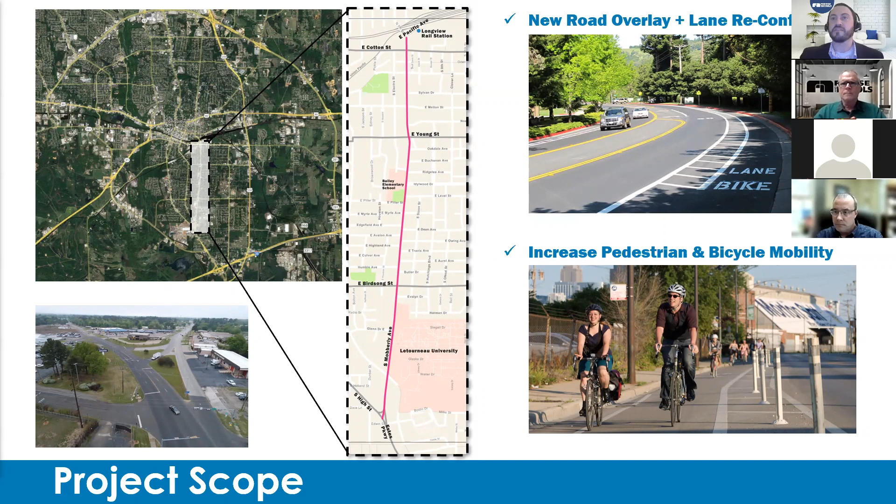The project is municipal bond funded, primarily through the Proposition B initiative. We've also been awarded a TxDOT grant for some additional funds to the project under their transportation alternatives program.

So we're really excited about that. It's good news. Sometimes it can be a competitive grant to get.

This is kind of the project schedule in a nutshell. This is probably going to be about a 3 to 4 year process. Right now, we are right in the middle of the study and report phase.

This is where we're focusing the bulk of our community involvement meetings. This phase started earlier this year in the spring, and it's probably going to run up until the spring of next year, where we're evaluating alternatives and developing concepts for the road corridor itself.

We're going to move into the preliminary design phase after that, in the spring of 2022, where we'll look to take our design concepts and implement them along the corridor. That will probably take up until the fall of 2022.

And then after that, we start putting together our construction documents at the end of 2022, really looking to get this thing out for bid for contractors by the summer of 2023. You're probably looking at about a year-long construction period, where the project might get built around November of 2024.

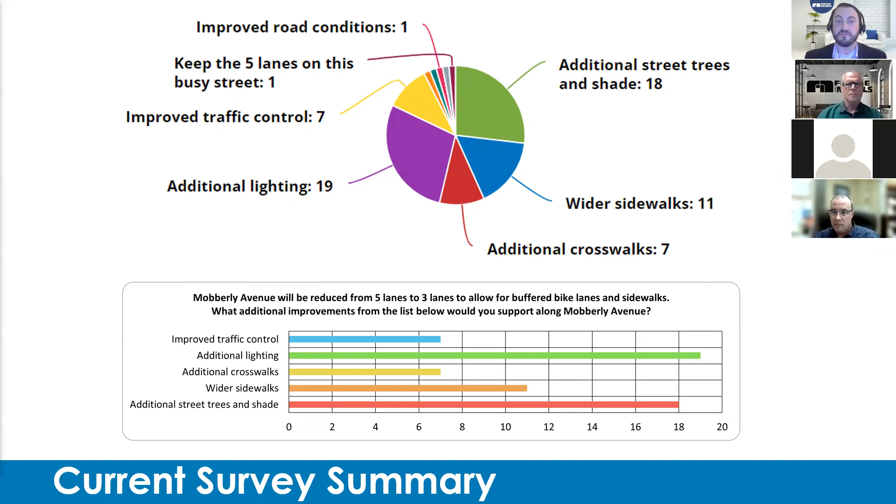And so far, if you look at that pie chart, additional lighting is identified as the biggest need on Mobberly by you guys. And then a close second would be the need for street trees. So that was some good information we received.

Another part of the survey is a mapping exercise, where we actually have an aerial map of the proposed project limits, and we just ask you to put pins on the map. Where do you think the needs are? Where do you think some of the issues are? And it was a good exercise.

Some key takeaways so far: some folks identified that they'd like to see some site furnishings near the Young Street intersection. We learned that there are people who like to bike to South Ward Community Park. We heard multiple times people want more street trees, and we saw some safety concerns on the east side of Mobberly between Melton and Timpson. Good information, and we hope you keep adding to that so we can build a good database of feedback to take into the design phase.

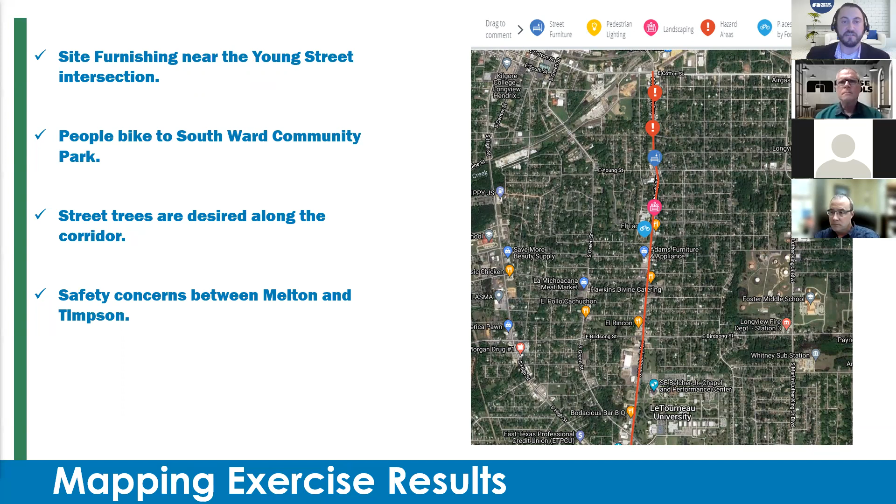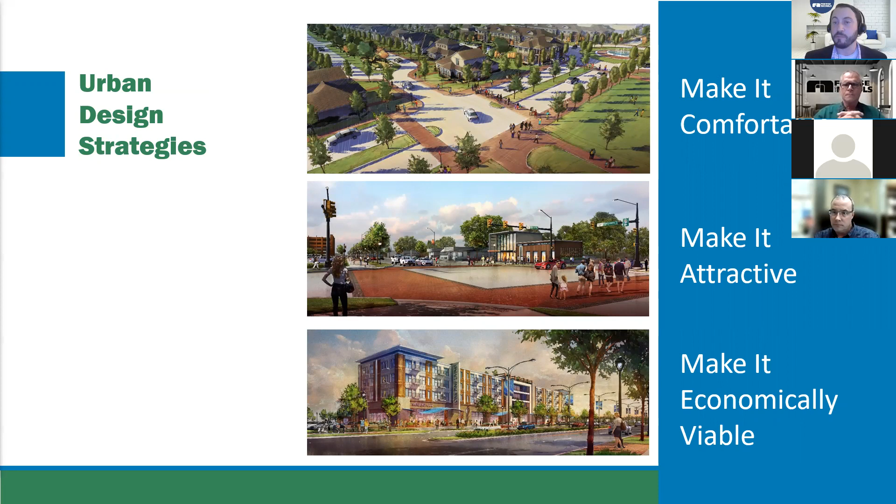So why are we asking you questions about what you might want to see added to the project? This is a complete street project, and the primary goal is enhancement of pedestrian mobility along a road, with bike lanes and sidewalks. Those are givens on projects like this, but it's one thing to provide them and another to make them usable. We want people to want to use the bike lanes and walk on the sidewalks. So we employ various urban design strategies to make these complete street projects more successful. We want to make it comfortable and attractive for people to be there, and economically viable so it can attract outside development interest.

Right now, early in the process, we're evaluating a lot of things and developing different alternatives for how we approach different elements. Looking at the public involvement, we're identifying key focus areas, and street trees was a high priority item on the list. So right now we're in the process of evaluating how we want to do that.

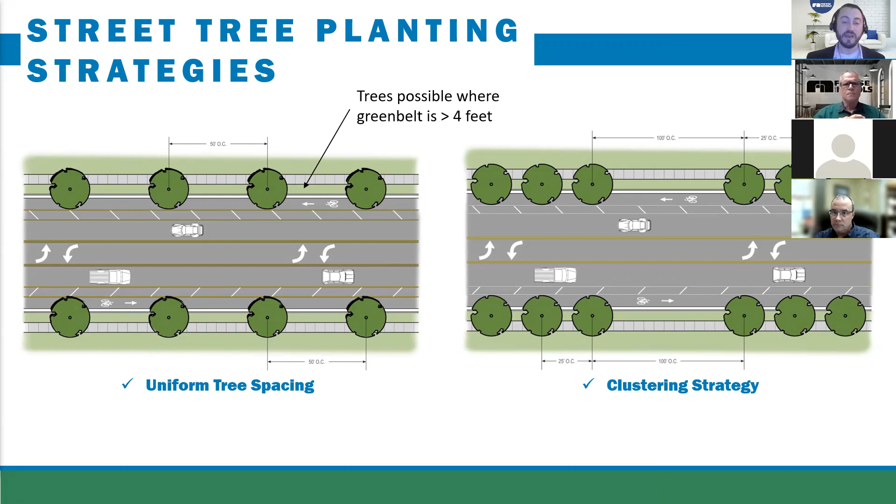Where we've got a parkway strip from the back of curb to the sidewalk, if that's less than 4 feet, we won't be able to put street trees there. But if we've got a good 4 foot or greater space, that would be a primary area where we'd look to put street trees, and we're starting to look at how to arrange them — do we go with a more traditional uniform spacing, or look at employing a clustering strategy?

We're evaluating species. Tree plantings in open space is one thing, but roadways are a very different environment — they're very harsh on trees. So we really have to be careful with our species selection to make sure we're choosing the right trees for Mobberly. We want to make sure they're pollutant tolerant, and that they're native and adaptive trees that would do well in East Texas.

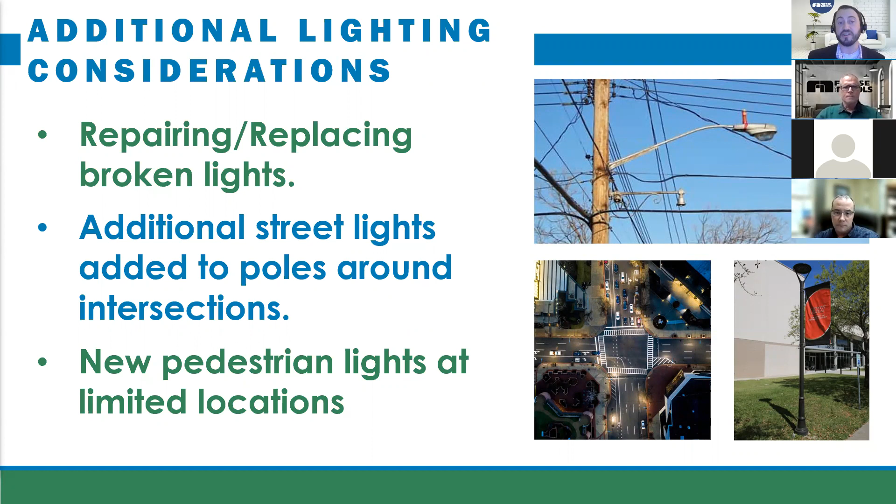Another thing we're starting to look at as a result of the survey: additional lighting was the number one concern people brought up. We actually observed some areas of the corridor at night and found that there were a lot of lights that were just not functional. So repairing or replacing lights that are out or broken could definitely be part of the project scope. Maybe we can look at additional street lights added to poles around the intersections, and in special areas where we think it would benefit, we could look at putting a couple of pedestrian lights at those limited locations.

So, complete streets. This is Kevin St. Jakes, our complete street expert. He's going to take you through the next series of slides.

Thank you, Matt. When we talk about complete streets, we want to be sure we're all on the same page. In general, over the history of developing our streets, we've become very auto-oriented. There was a movement a few years ago to make streets more complete for everybody to use — streets that are safe, comfortable, and convenient for travel for everyone: bikes, pedestrians, motorists, deliveries, and all sorts of things that have to go on our public streets. We're just trying to get everything in balance. We've got quite an investment in our public right of way, and we want to make sure it serves everybody.

Along the corridor, we've settled on one lane each direction with a center turn lane and bike lanes as a standard treatment. We've got some very unique intersections to work with up and down Mobberly. One of them is at Young Street — the crossing there has a very unique, very auto-oriented design, but it's got some things going on with it that we can actually make work better with our proposed design.

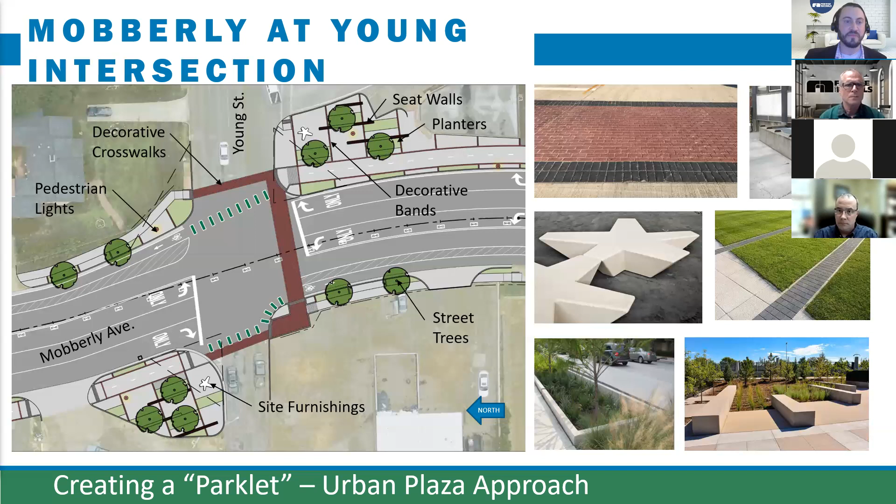So you could see some images of what some things like that look like. We're pretty excited about the opportunity this presents, and we're looking at options to make this a really cool space.

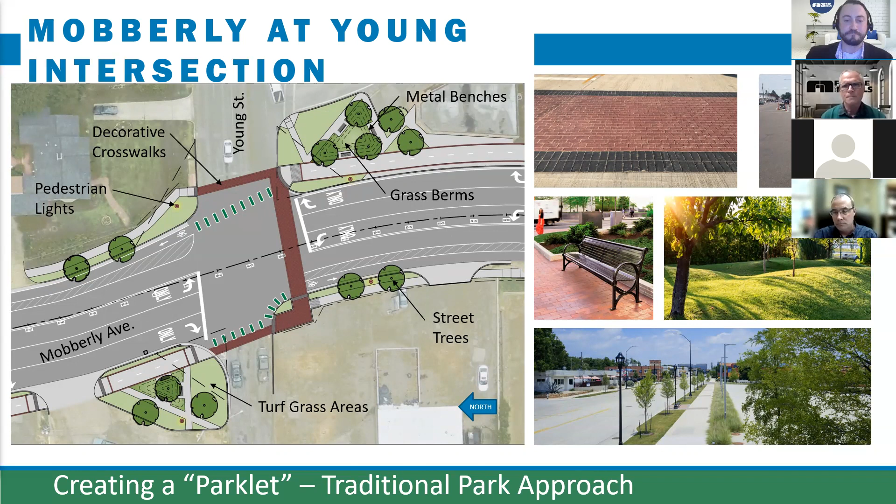So our typical section, you've seen this at our public meeting number one, and we're looking at this footprint and where it applies itself up and down the corridor. When we get to the intersections, there are unique opportunities, just as we see at Young Street, opportunities to maybe install a right turn lane if we really need one at that intersection.

And maybe even bring the bikes off and share the pedestrian space going through the intersection, as we did at Young Street. So we're looking at all these applications up and down this corridor to see what is the best and safest treatment to install for all users of the roadway.

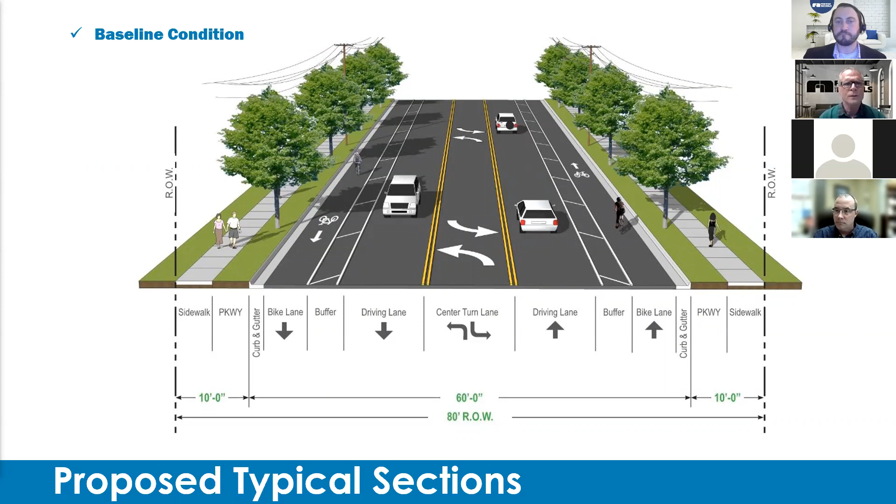Some of our very specific treatments we're looking at are an area just north of Young Street that has a bit of terrain on the east side of the street to work with. We're working on the concepts we'll be showing everybody, trying to get those fleshed out so we've thought of all the details and worked them to the advantage of everybody - adjacent landowners, pedestrians, bicyclists, and motorists as well. Matt, any other thoughts on this particular section?

No, I think the big thing here is addressing some of those accessibility issues on the east side. It's going to require a retaining wall, most likely, and a guardrail to help with fencing and fall protection, and railing to keep pedestrians safe up at their higher elevation.

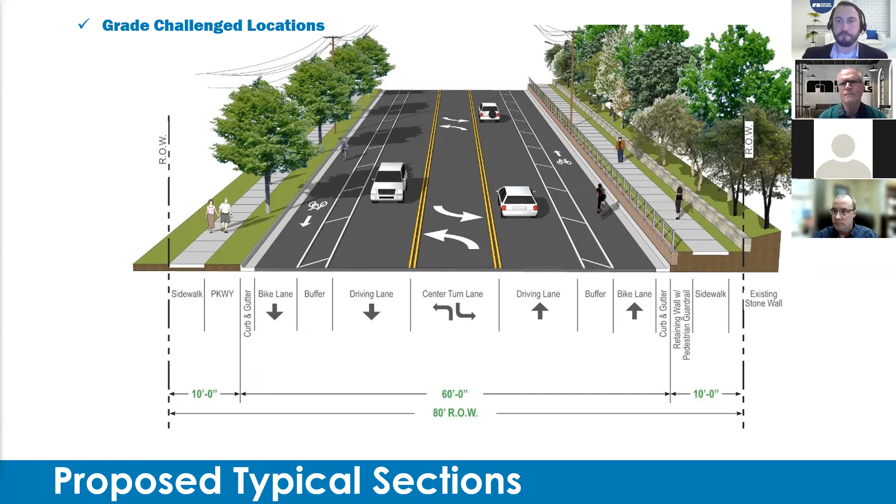Next slide. And of course, when we get to where we have more space along the east side of the roadway, specifically in front of LeTourneau, we've got opportunities to have a wider space, a meandering trail, even working up and down with some of the terrain and adding trees and landscaping along those edges. Those opportunities are available for any area up and down the corridor.

If landowners want to work with something on their side of the right of way to enhance the trail or the sidewalks along that edge, we're more than open to opportunities to do that.

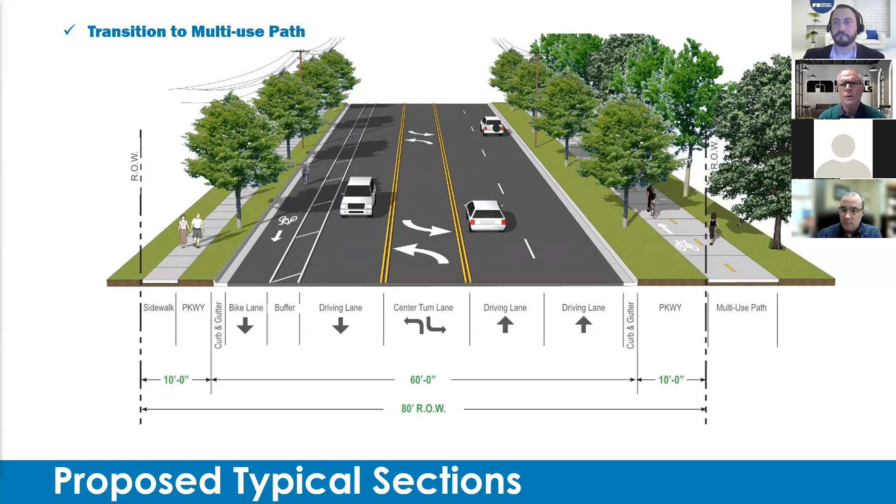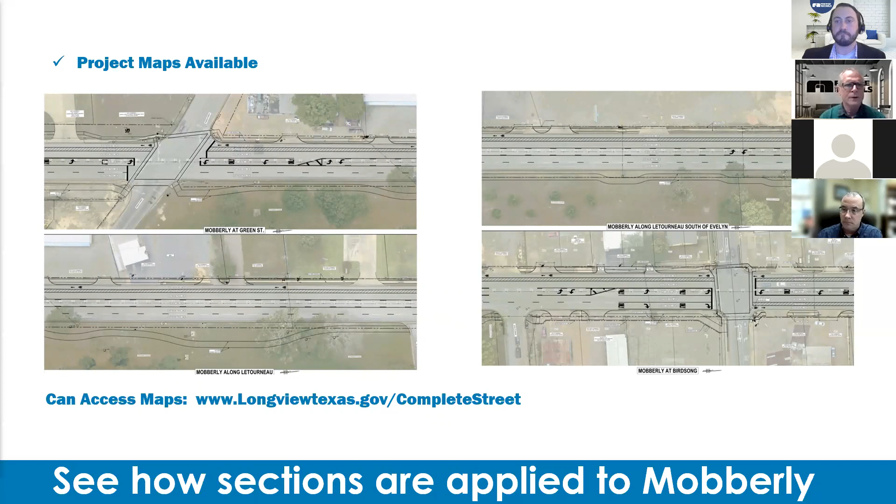We've got a lot of mapping that we're preparing, and a lot of it is posted on our website now. If you go to longviewtexas.gov/completestreet, you'll find all of our maps of the corridor alignment as they are now, and we will keep updating those as the concepts come along. We'll be very open as far as sharing all the information as we develop it.

And the same goes for parking. Parking, as you know, is pretty prevalent up and down this corridor. There are a lot of different configurations of pull-in parking and things encroaching on the sidewalks. So we want to make the pedestrian experience up and down this corridor as enjoyable and clear as possible, while maintaining the business needs of parking.

So we're collaborating with each individual property owner up and down the corridor. We've got some interesting things to work with, maybe even angle parking and reverse angle parking up near some of the park area near the school. We have a lot of ideas coming up, and we'll be sharing them as we go.

Bob Watson with the city is reaching out to individual property owners for some of the more complicated parking configurations and reconfigurations. If you have concerns or thoughts about how things should be done, give Bob a call and let him know you'd like to have a chat.